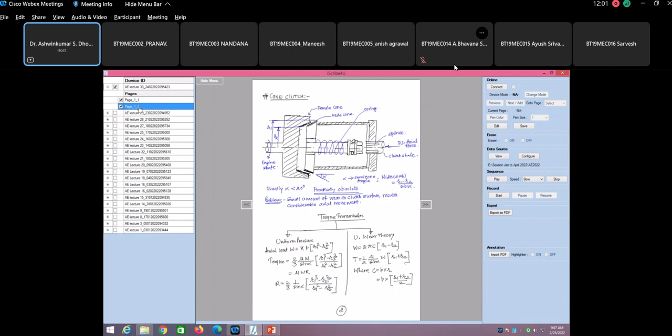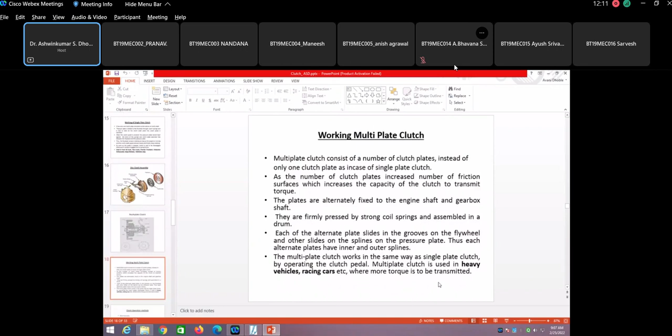Now today we are going to discuss the centrifugal clutch. Let me see if I have got the presentation on the centrifugal clutch, so if it is there, then we can discuss this. Yes, it is very much given here, but there are no practical or calculation details here.

So this is the centrifugal clutch, which works on the principle of centrifugal force. The upper surface of the shoe is covered with friction material. The spider is fitted on the driving shaft. This particular part is known as the spider, and the complete thing is also known as the shoe. When centrifugal force equals spring force, the shoe is just floating. But when centrifugal force is higher than the spring force, the shoes move outward and come in contact with the driven member and press against it. The increase in speed causes the shoes to press harder, and the clutch transmits more power.

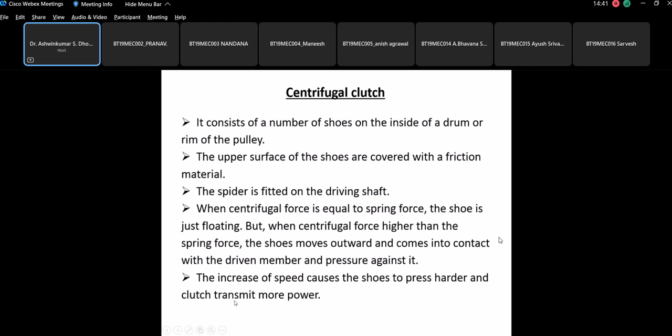So this is how the engagement takes place. Now we are going to do the analysis of the centrifugal clutch, then we will see the advantages and disadvantages of this centrifugal clutch. So I'll shift to the blackboard, I will shift to the new screen.

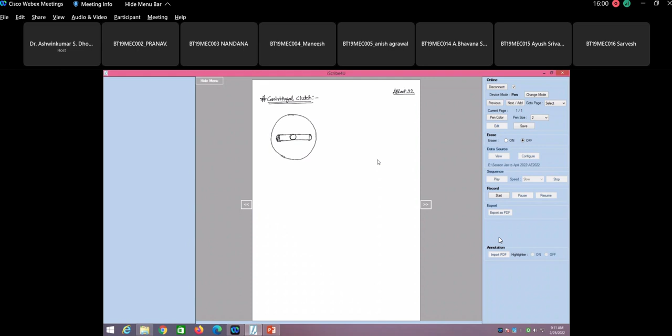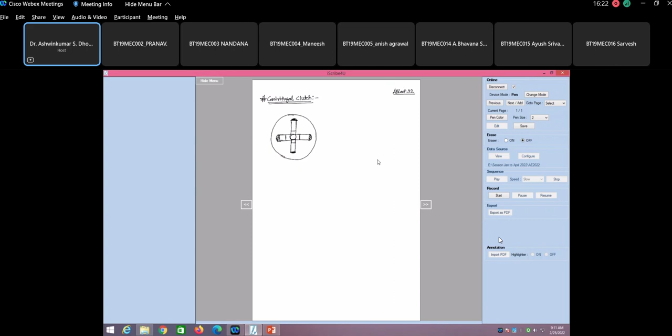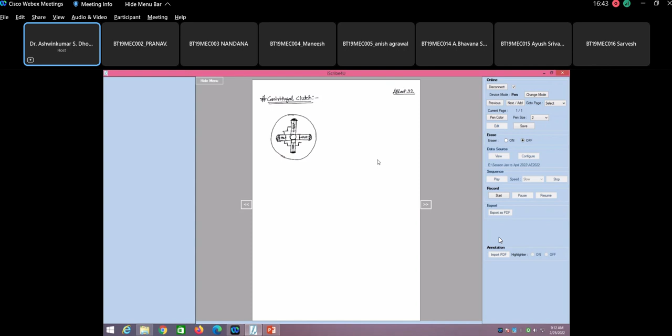Centrifugal clutch: if I have to draw the figure of the centrifugal clutch, it will be like this. This is the outer drum, this is the center portion, and this you can say is the friction surface. There is a spring over here, and the spider is there. This is the arrangement which will hold this complete assembly in place. So this is nothing but the centrifugal clutch. You can say this is the inner surface of the drum, this is the spider, then this is the friction surface, and this is the spring. The complete assembly is basically the shoe.

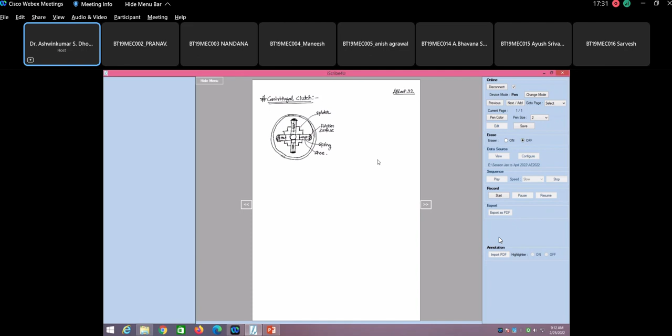Now we need to determine the weight of the shoe. This is basically the complete assembly which you can say is the shoe. I will show you the exaggerated view of this particular shoe. First is the determination of weight of the shoe, because this is the design parameter as far as the centrifugal clutch is concerned.

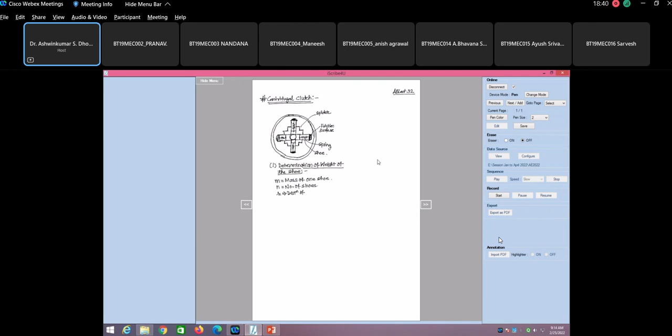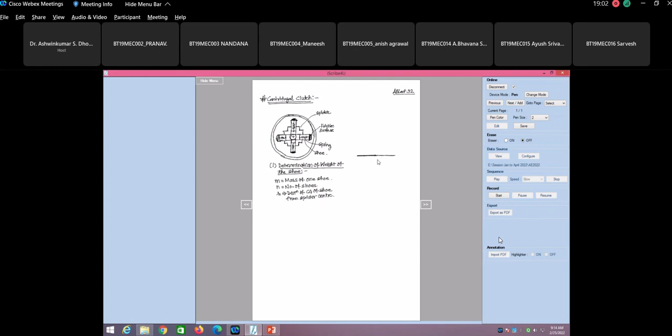Let M be the mass of one shoe, N is the number of shoes, and R is the distance of the CG of the shoe from the center of the spider. So it is the distance of the CG of the shoe from this particular point, the spider center. If I have to draw the exaggerated view of the shoe, let us say this is the reference line and this is vertical, then the shoe is something like this. This is the exaggerated view of the outer portion.

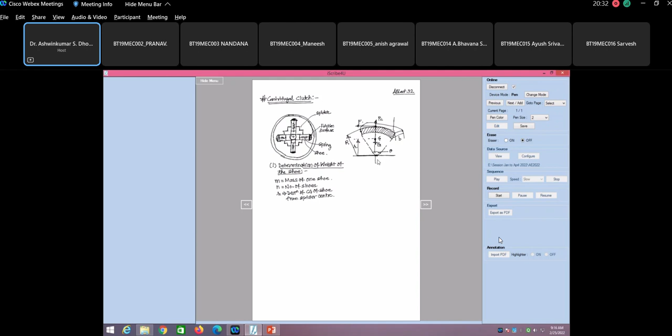Then on this side, if you draw this, there will be some thickness which you can term as B, and the outer radius of the shoe is capital R. The force which acts here due to friction is F, and this is the width of the shoe. This end portion, this length, is the length of the shoe. So these are the total dimensions for the shoes.

So we are saying that capital R is the inside radius of the rim. That means this distance is the inside radius. We assume that there is very negligible clearance between the shoe and the inside radius of the rim.

Now omega is the angular running speed of the rim or pulley. This is the outer rim. Actually, sorry, this should be the inside rim. The outer one will be there after engagement.

So omega 1 is equal to the angular speed at which the engagement begins.

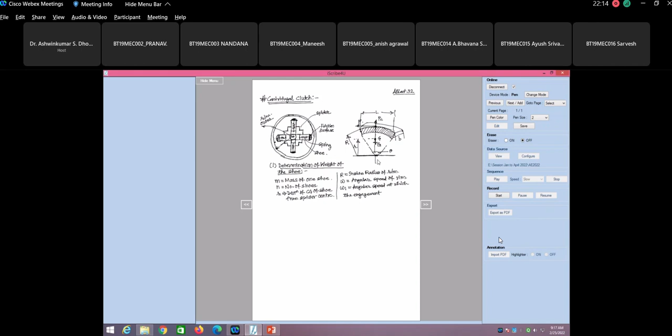Say the drive will be given to the inner shaft, that means to this particular portion. Then, based on that, the shoes will be moving in the outward direction because of the centrifugal force, and there will be contact of the shoes with the outer portion. So if you see this figure, this is the outer portion and this is the driving shaft. When the driving shaft's omega reaches a particular speed, it will get engaged with the outer hub, or outer rim, which it will touch. So this is the speed.

Now we have to do the analysis of this. So first is the frictional force acting tangentially on each shoe. We'll write down the expression for that.

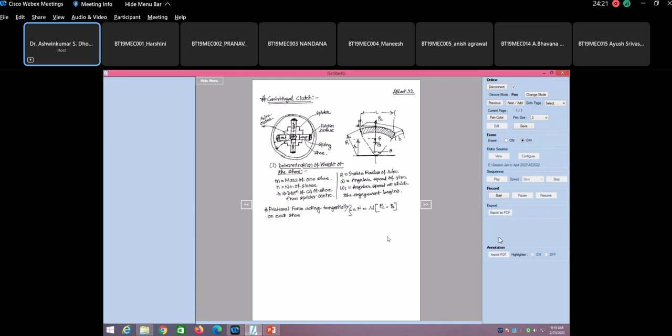We are doing the analysis for that. This equals F is equal to mu times the centrifugal force minus spring force, because spring force will be opposite to the centrifugal force. So whatever the normal reaction is, the resultant normal reaction multiplied by mu, that is going to be the frictional force which will act tangentially on each shoe. Now this is basically the net radial force.

If you say that this is the net radial force, okay, now PC, that is the centrifugal force, is given as at each shoe m r omega square.

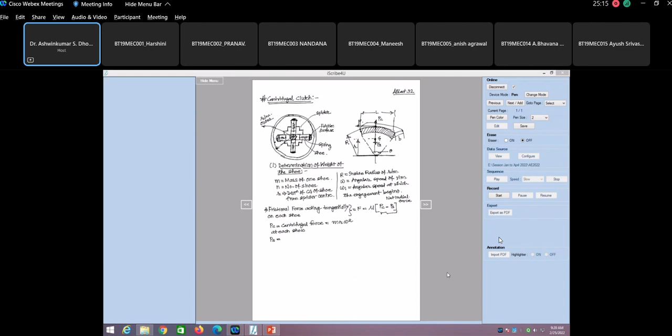And PS is the spring force. PS is the inward force on each shoe due to the spring. So this is usually expressed as 9 by 16 m omega square r.

Here the assumption for this is the engagement angular velocity omega 1 is equal to 3 by 4 of omega. So actually the spring force should be mr omega 1 square. If you put the value of omega 1 square as 3 by 4, you will get 9 by 16.

Yes sir, isn't the spring going to bend as it is rotating and it comes into contact with a stationary drum? Sir, why will it rotate, sir? The spring is so stiff that it will have the force, but not to the extent of complete expansion, so it will not bend.

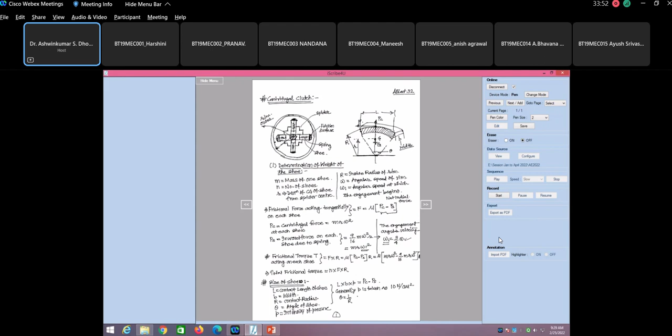Okay, now usually this P is generally taken as 10 Newton per centimeter square. As I told you, in automobile design we have to assume certain values. So here they assume P equals 10 Newton per centimeter square, and theta equals L by R, with theta generally taken as pi by 3. So because there are certain thumb rules, from here pi by 3 equals L by R, so L equals pi by 3 of R.

So if you substitute this L, which is pi by 3 of R, here, you can get the value of B. Let me shift to the next page and write this L here so you don't get confused - if you substitute L here, you will get B, the width. So this is how you can design the centrifugal clutch. From here you get the frictional torque, how much needs to be transmitted. From there you can find the mass of the shoe, and from here you can find the length and width. So this is how you can design the centrifugal clutch.

Now there are some features of the centrifugal clutch which we should know. Sir, is anybody having any issue as far as this discussion on centrifugal clutch is concerned?

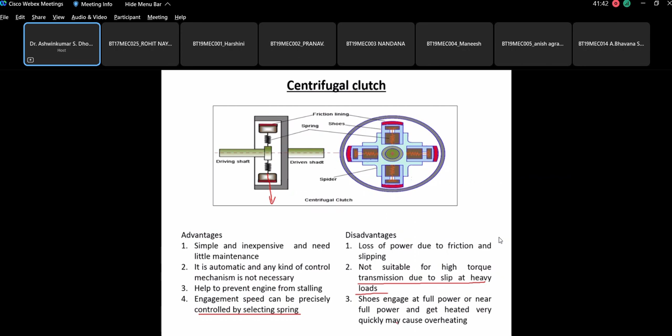Shoes engage at full power or near full power and get heated very quickly, which may cause overheating. This is another issue - if you maintain the engagement speed related to rated speed, overheating may occur. Also, to reach the rated RPM you have to raise the engine RPM, meaning you burn more fuel, which is not advisable as it pollutes the environment. So all these vehicle components have very sensitive design, especially if the vehicle has to meet emission standards. These are the probable disadvantages of the centrifugal clutch.

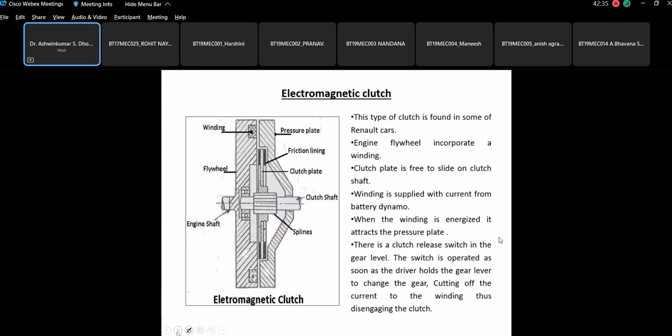Now, electromagnetic clutch - we will not discuss it right now. We will be solving one problem based on the design of the centrifugal clutch.

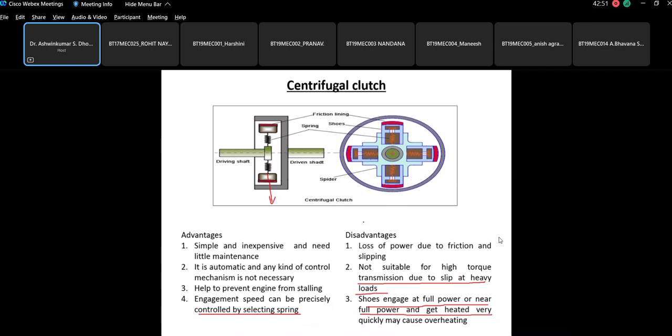Now in this particular problem, I will require your help for calculation, because I don't have the solution for this. I have not solved it myself. So let us see what best we can do as a team, because if we don't do it as a team, then...